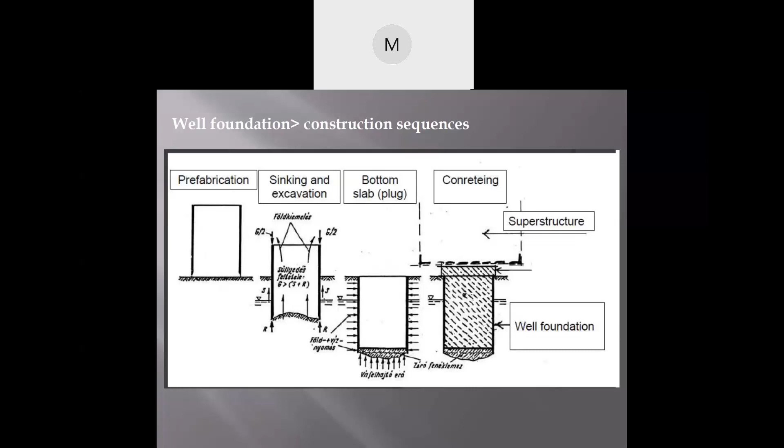So these are now the construction sequences. First of all, the first stage is prefabrication, that means a prefabricated structure is constructed. Then sinking and excavation of the well is done on the basis of their self load. Then after that we have the bottom slab plug that I discussed in the last class. There is a bottom plug, and after that we just do the concreting above it. You just put the well cap and then do all the necessary concreting. This is how the basic steps are there.

Now we'll have stability analysis of your foundations. So I'll give you a brief overview about it - stability analysis of your well foundations.

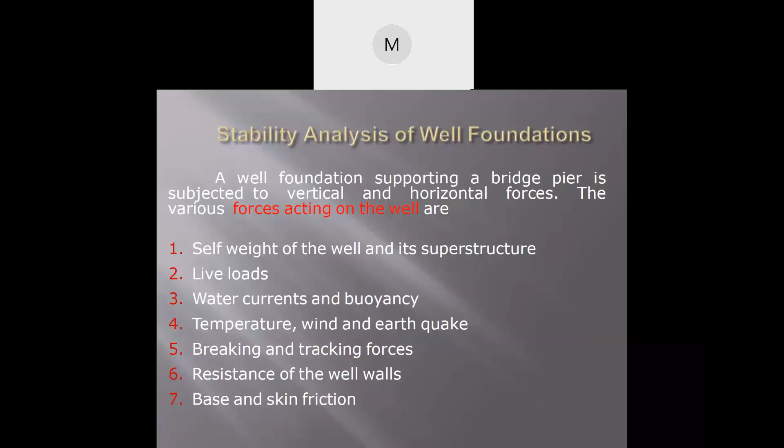So a well foundation, which is supporting a bridge pier, is subjected to vertical and horizontal forces. The various forces acting on the well are self weight of the well and the superstructure, then live loads, water currents and buoyancy, temperature, wind and earthquake, braking and tracking forces, and resistance of the well walls, base and skin friction. Now, as per IRC and IS 3955, the following design procedures are recommended.

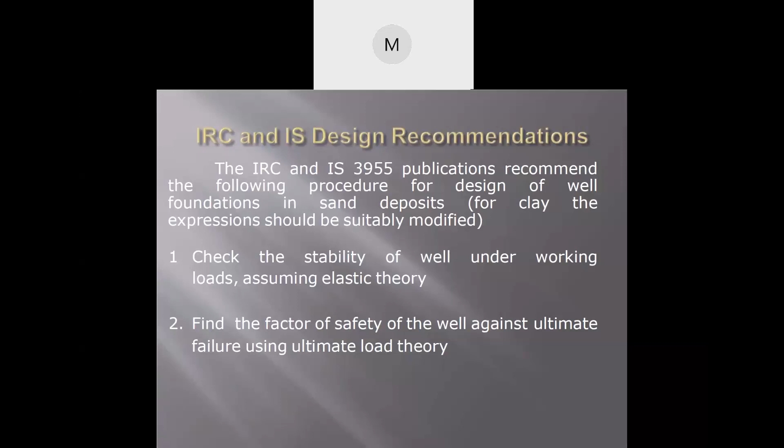First of all, check the stability of the well under working loads, assuming elastic theory. Then we'll have to find the factor of safety of the well against ultimate failure using ultimate load theory. So these are the two basic things required to be considered while designing a well.

Now, design of wells basically involves the following findings: number one, depth of the well; number two, size of the well; number three, design of the other components. So the depth, size, and design of the other components.

Now, tilt and shift - what are these basically? Suppose the well sometimes shifts from its original position, or it causes obstruction on one side of the well. So the well sometimes may tilt or shift from its original position. Then there may be certain problems.

Now these problems are basically the causes of those tilt and shift. Number one, non-uniform bearing capacity - the bearing capacity is not uniform. Then number two, obstruction - if obstruction is present on one side of the well, then there may be tilt and shift.

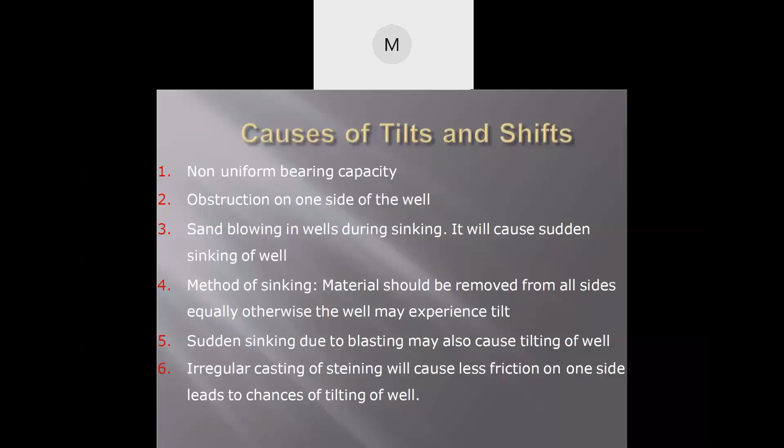Now, sudden sinking due to blasting may also cause tilting of the well. Then irregular casting of steining will cause less friction on the side, leading to chances of tilting the well. Now, if the steining is not cast in a regular manner, this will cause less friction, which will eventually lead to the tilting of the well.

Sinking of caissons - now, caisson means that outer casing of the well. There may be certain sinking of caissons also.

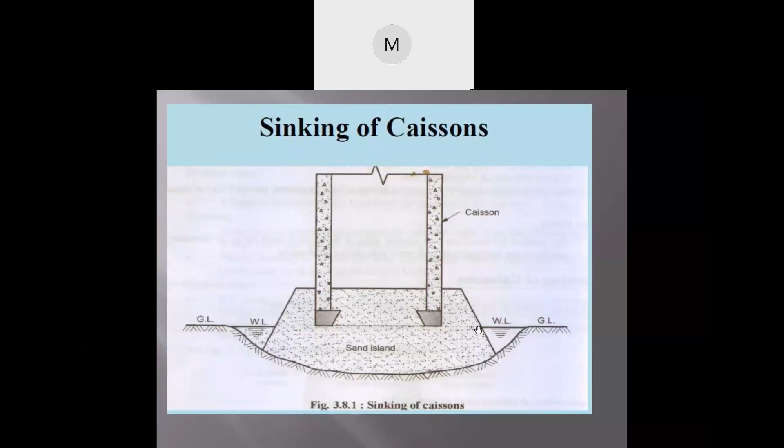Now, in order to prevent and avoid this tilt and shift, certain precautions are required to be taken. So what are those precautions basically? The cutting edge of the caisson must be thick and sharp pointed. The external surface of the steining and caisson curb should be smooth. The dredging should be done uniformly on all sides in all pockets of the caisson.

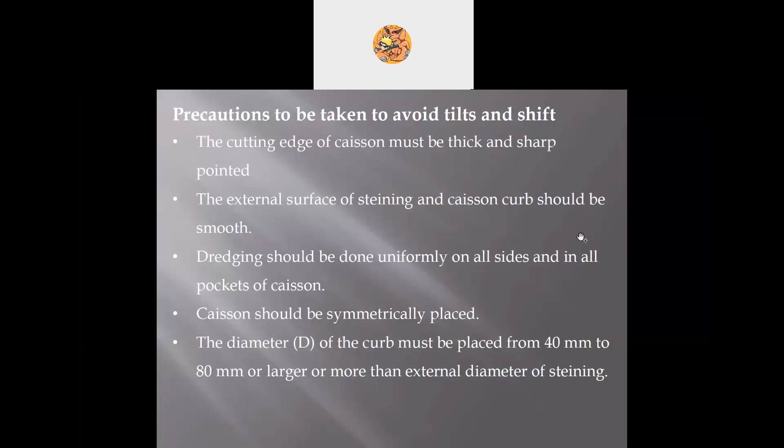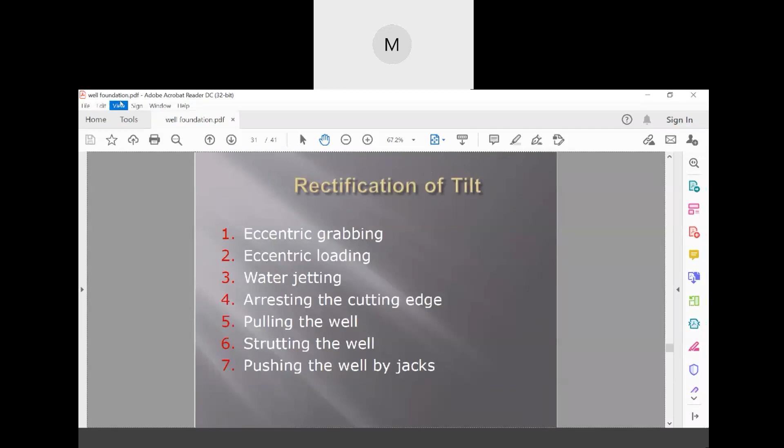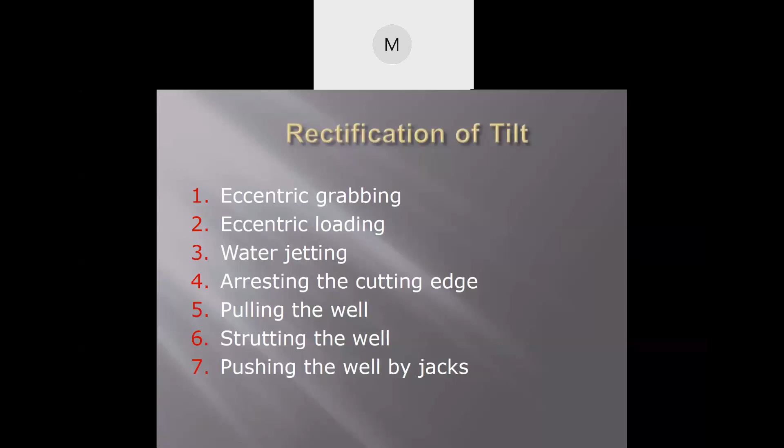So now it is rectification of tilt. Now how is the tilt to be rectified? Number one is eccentric grabbing. So what is eccentric grabbing?

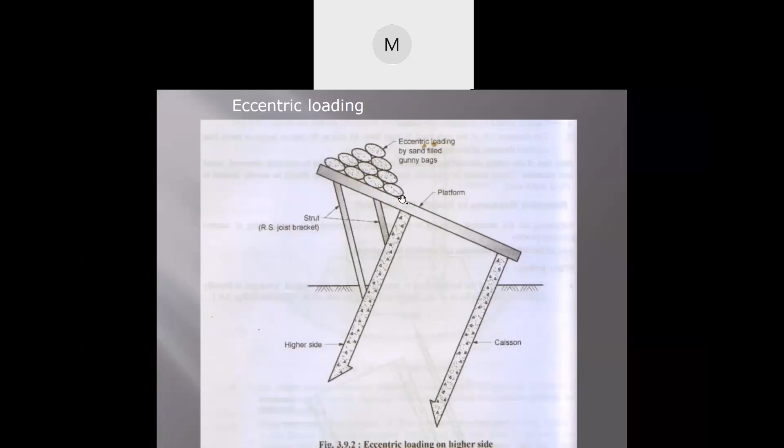Then water jetting. What is this water jetting thing? Can anyone say what this water jetting thing is?

Sir, maybe to loosen the soil. You are almost correct - to loosen the soil, so that it can tilt back to its position. Good. What about others?

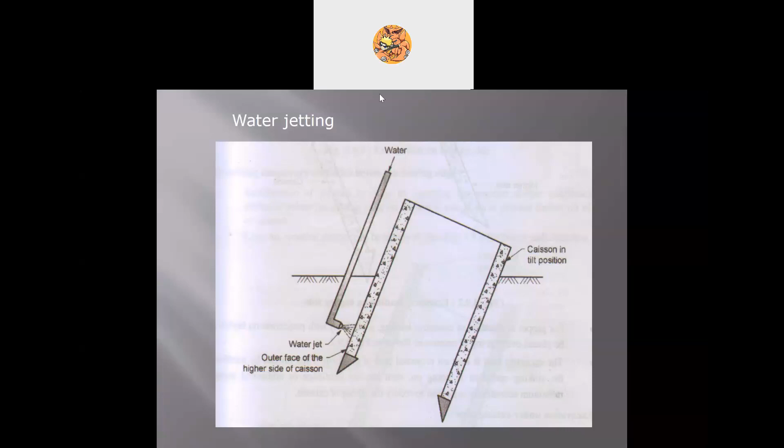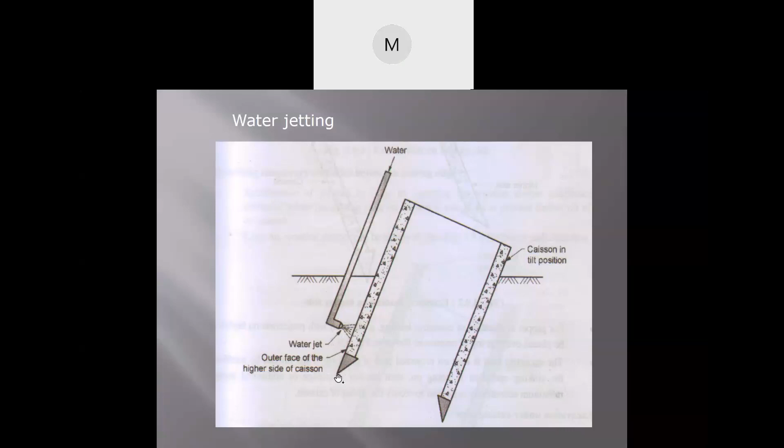Okay, good. So basically, the water is supplied through a jet, and then what happens is that this bottom part will get dug up, right? That means this will eventually sink down.

Next is excavation on the higher side. Now this is a simple thing, everyone knows it. If you are excavating here using an excavator, then this will sink down, no? These are certain simple techniques.

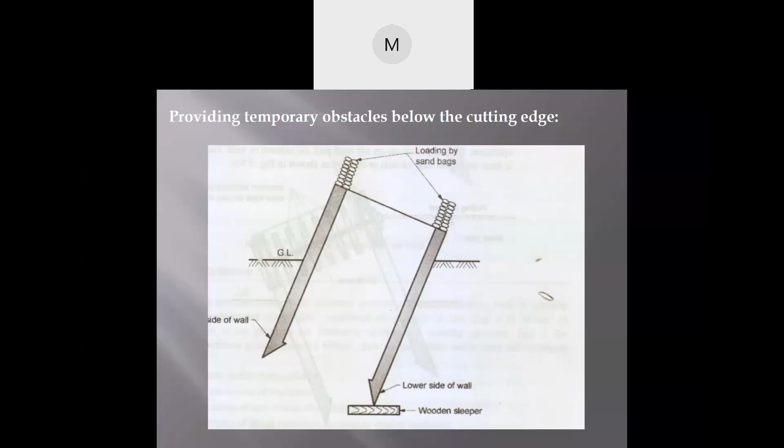Now this is eccentric loading only, but this is a bit more complicated. We have to put some temporary obstacles below this cutting edge, and then place some loadings. But putting an obstacle in the bottom part is a very difficult task. Then, pulling the well or caisson.

Now look, this well or caisson can be pulled up, but this also requires a lot of time and energy, and resources are also required, heavy machinery and all. First of all, you have to put wooden sleepers, and then you have to tie it with a steel rope. Then it is pulled with a rope. So this is a very difficult task also.

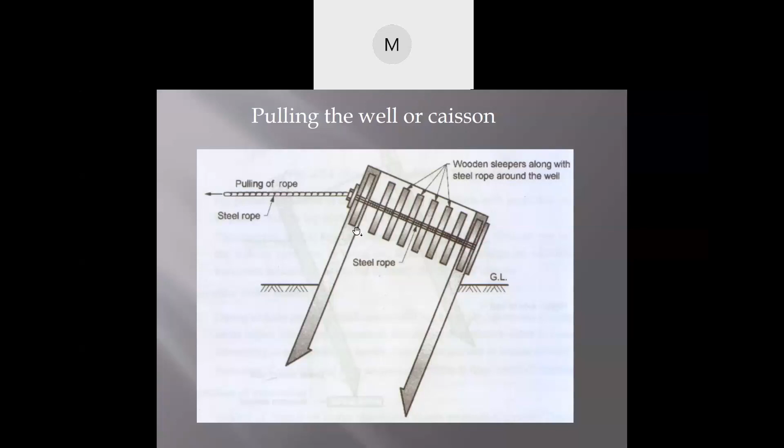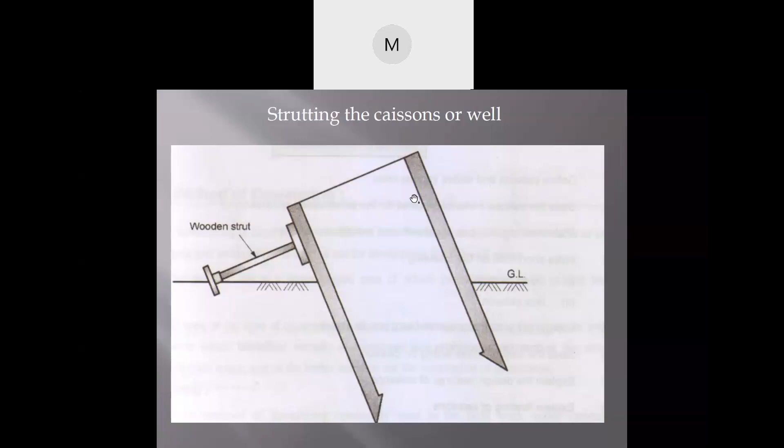The initial ones are very simple. And this wooden strut is what? This is the permanent structure that is attached to it. Now, what will happen? This will prevent more tilting. So this will prevent more tilting. This means what? It can be pulled from this side and then again it can be made straight. Okay.

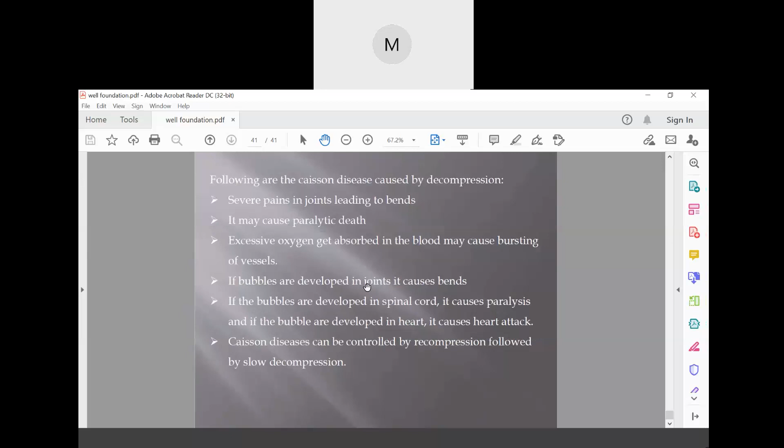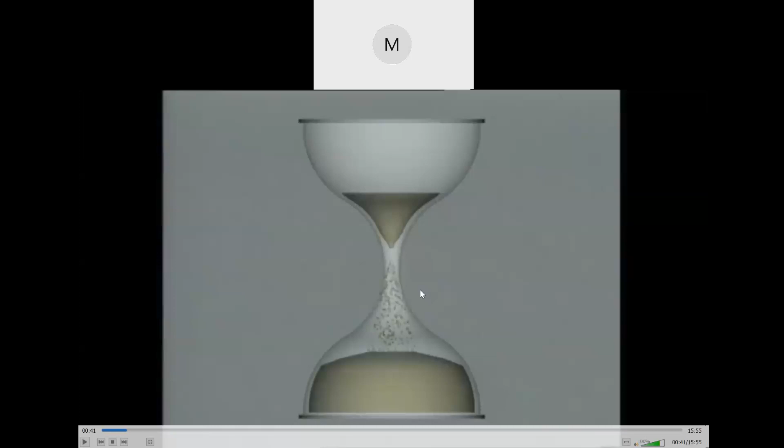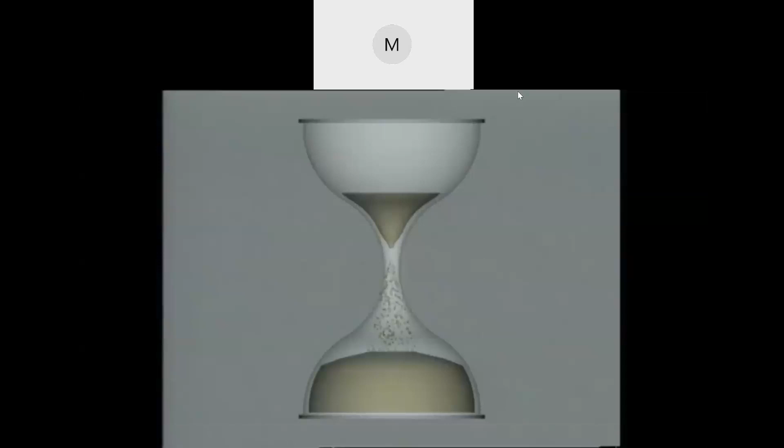The video that I showed you in the last class, was it clear for all of you, or should I show you that video again? Yeah. Again. Okay. Fine. Now you will understand it much better. Okay, I'll show it again. Can you all see the screen? Yes? Okay, that's great.

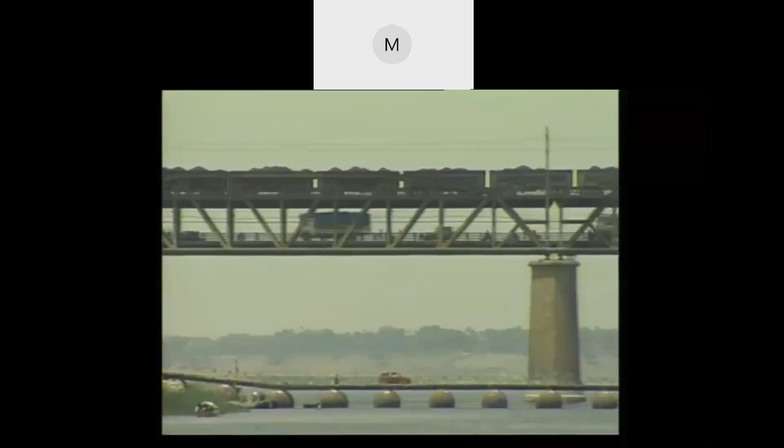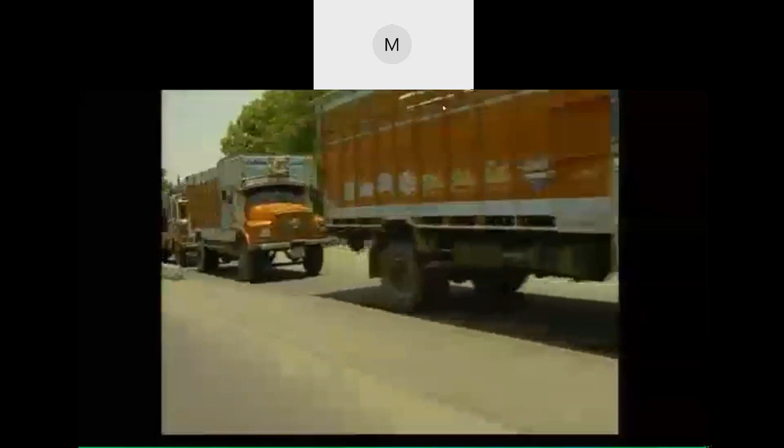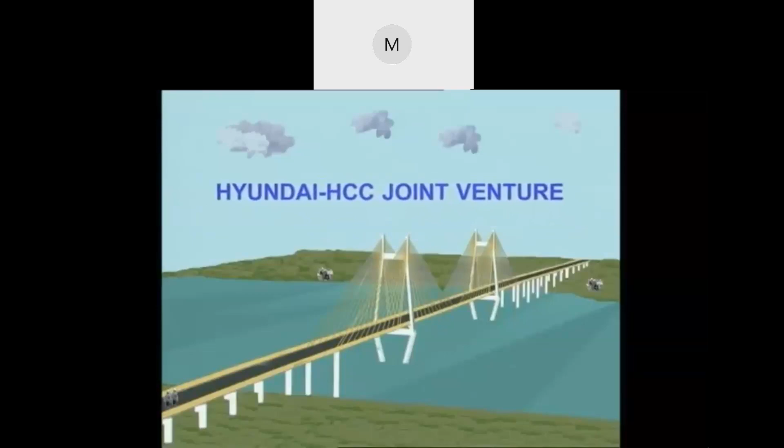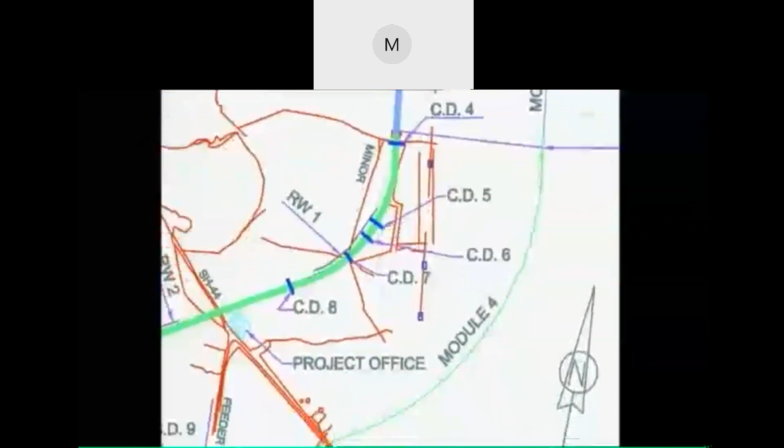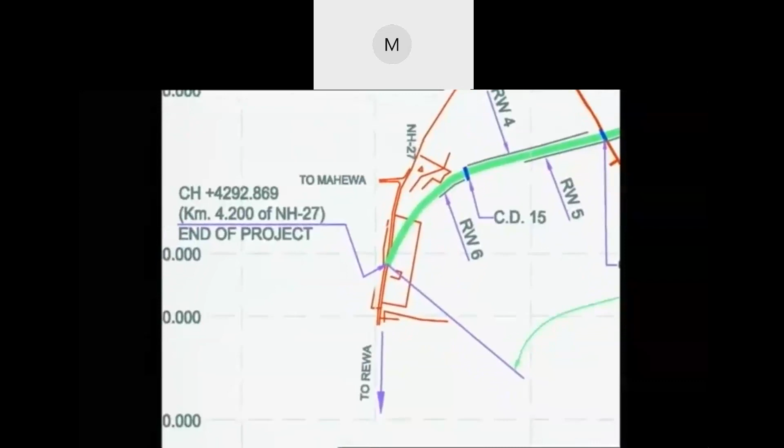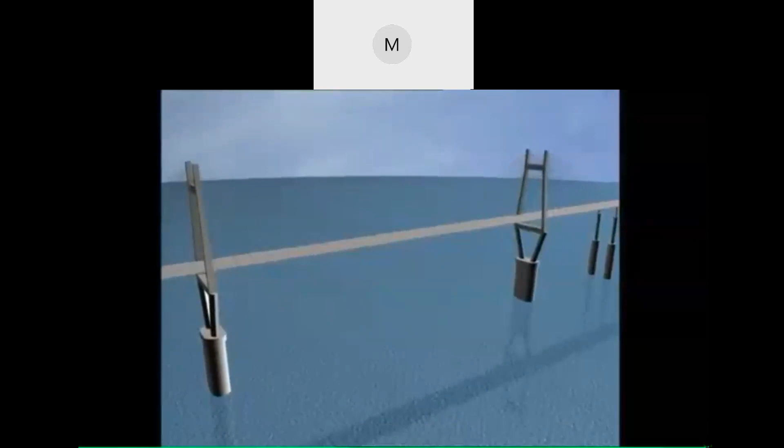Following a detailed survey of the area on both banks of the Yamuna, the National Highway Authority of India finalized alignment of the new bridge connecting GT Road on NH2 on the Allahabad side with Rewa Road on NH27 on the Naini side. The total length of the connection is 5.155 kilometers, comprising of 3.5 kilometers of approaches and 1.5 kilometers of actual bridge. The river Yamuna is still extensively used for navigational purposes by local people. Hence, another challenge before NHAI was not to disturb the navigational use of the river. NHAI, therefore, decided to opt for a cable-stayed bridge, as it provides wider navigational passage. For speedy and systematic completion of the work, the entire scope of the work was divided into 4 independent modules.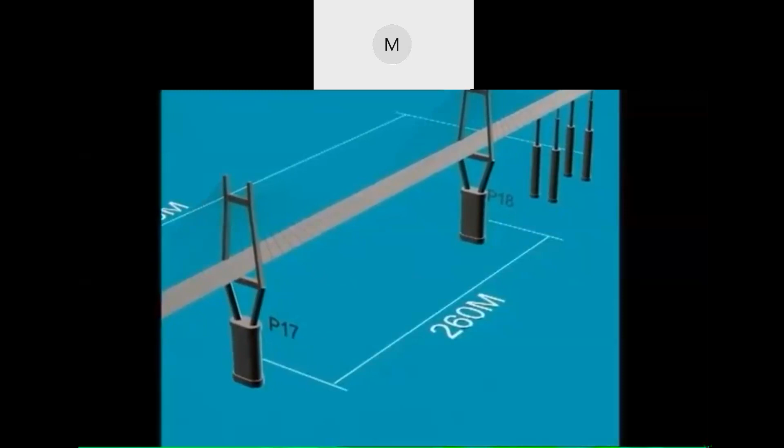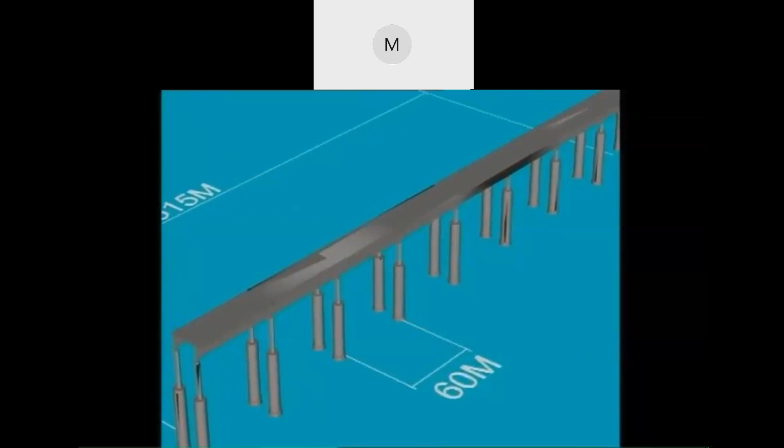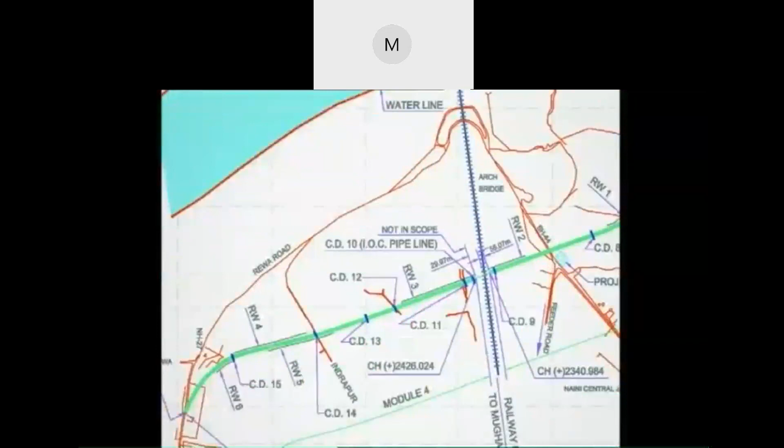Module 1 contains cable stayed portion of 630 meters length with central span of 260 meters, supported on double D well foundations with depth up to 40 meters. The approach viaduct of 515 meters length on the Naini side with spans of 60 meters founded on circular well foundations is included in Module 2, whereas the 365 meter long approach on the Allahabad side with 25 meter spans supported on 1.2 meter diameter piles is included in Module 3. Approach road works, which includes embankment works, retaining walls, cross drainage works, pavement works, safety signboards, etc., are included in Module 4.

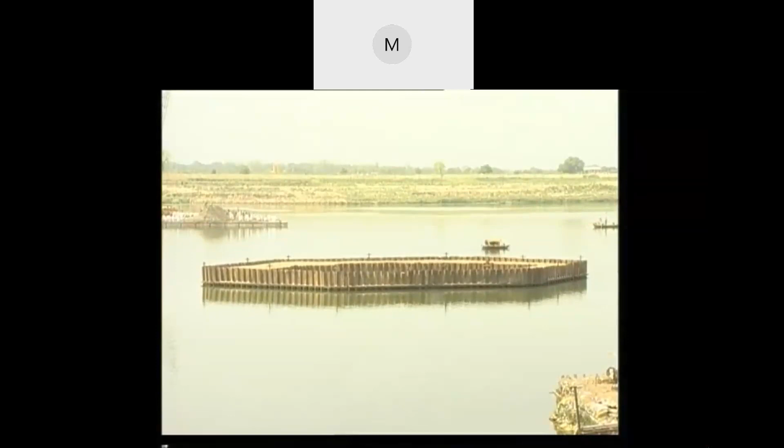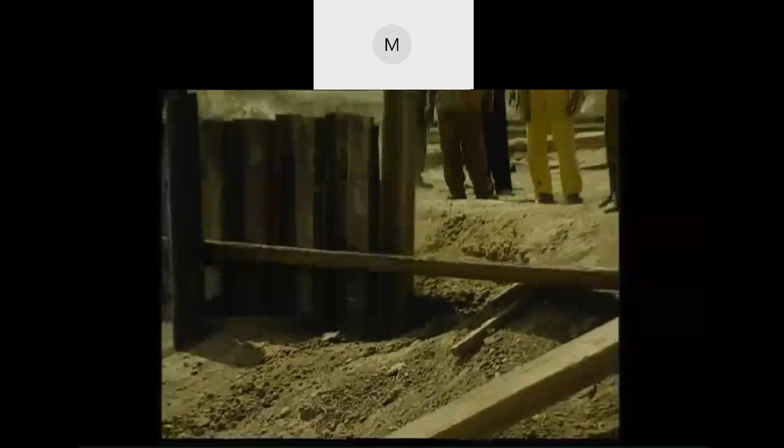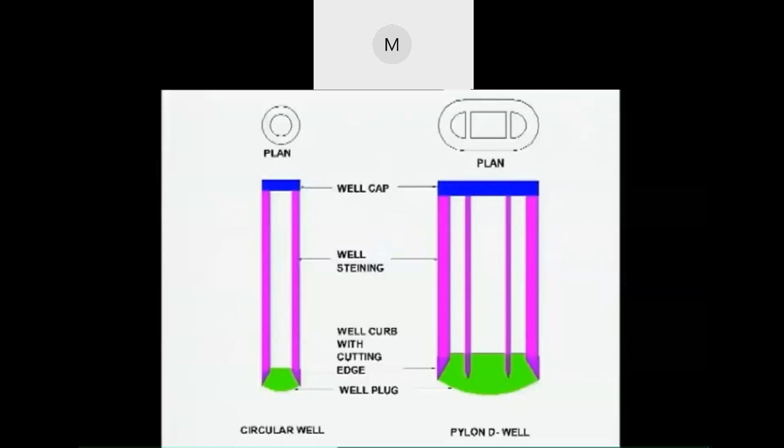After the center line of the bridge was established with the help of precise survey, foundation works were taken up. Foundations of the pylons P17 and P18 supporting cable stayed portion had to be built in the middle of the riverbed, which were enclosed by coffer dams, access to which was provided by jetties constructed on both banks. The jetty on the Naini side is 260 meters long with double sheet pile enclosure driven by vibro sinkers. The jetty on the Allahabad side is a timber structure 100 meter long. Well foundations. The well foundation work is executed in the following stages: cutting edge, well curb, steining, bottom plug, and well cap. Cutting edge. The cutting edge serves to cut through the soil strata and facilitates the sinking of the well to the desired founding level.

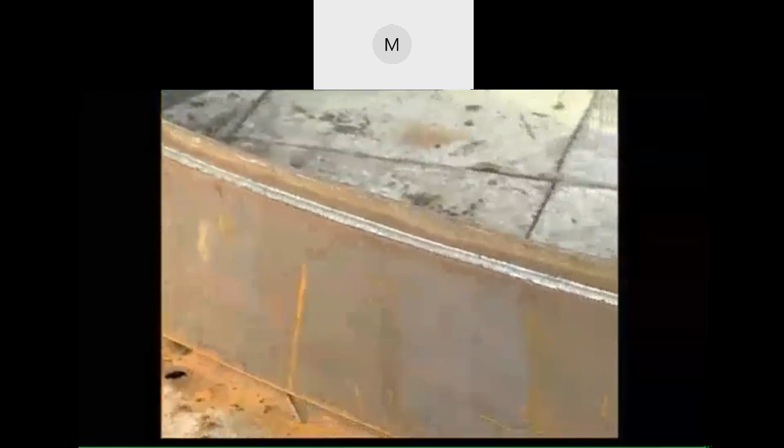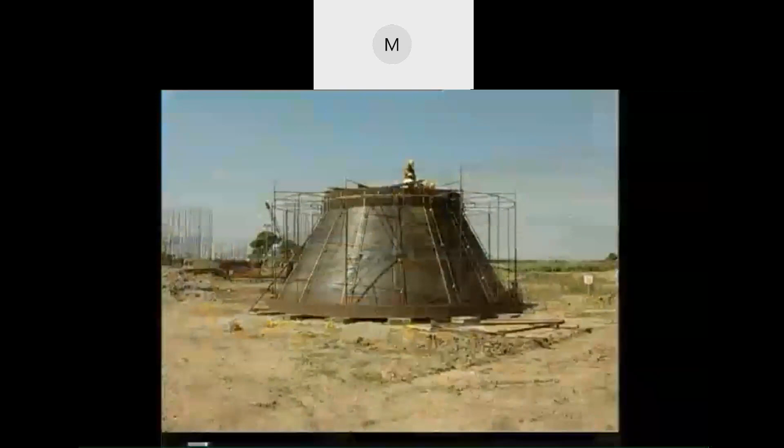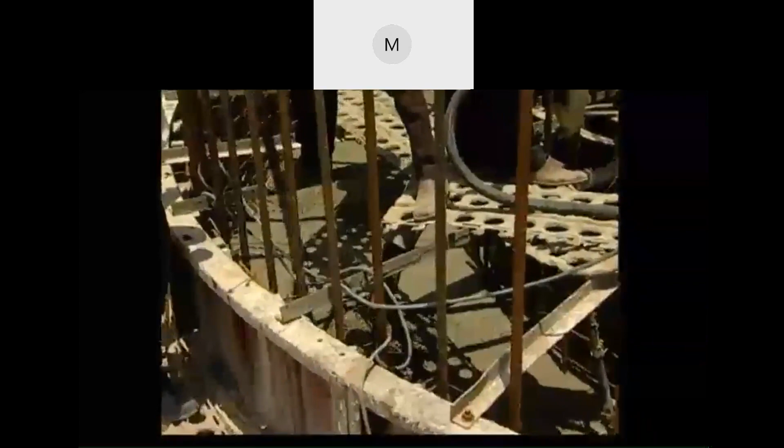The cutting edge consists of back-to-back angles welded with a 12 millimeter plate bent to shape on the outer periphery. Before the final assembly of the angles, holes are drilled into the face of the angle to receive the bond bars. The cutting edge is placed on timber sleepers after the ground is leveled and center point is established. Well curb. On the cutting edge, well curb is cast in concrete within tightly fitting inner and outer forms with embedded reinforcement. Plywood formwork of PERI make is used for pylon wells. The concreting is carried out in layers using concrete pumps and transit mixers. Needle vibrators are used for compacting the concrete. The well curb is pitched into the ground by removal of sleepers placed beneath the cutting edge. The dredging inside the well curb is carried out manually. Well steining. When the well curb is partially sunk into the ground, well steining is built in lifts of 2.5 meters and sunk into the ground. Well steining for pylon wells is built in lifts of 2 meters height.

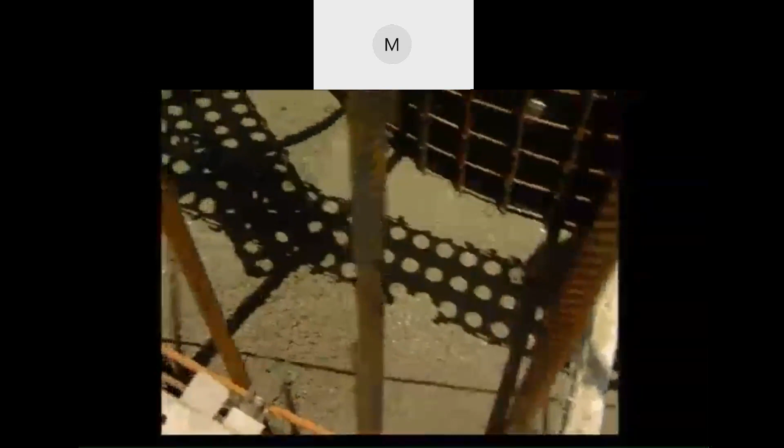The concrete is transported from the batch plant and is poured using a concrete pump. For P17 well, the concrete is placed by crane and bucket arrangement. Concreting is done in clockwise direction in layers. The green concrete is vibrated using needle vibrators.

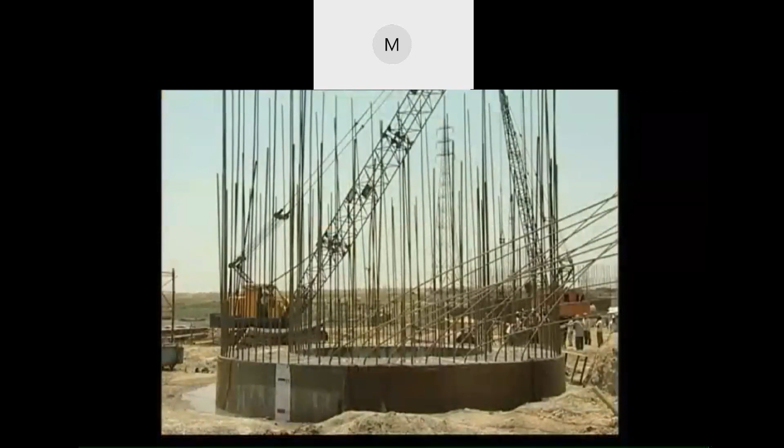Well sinking. Well sinking is an important activity and is carried out with utmost care. The wells normally sink into the ground by their own weight. The soil underneath the cutting edge and in the central dredge hole is removed by using grabs. Continuous grabbing operation is carried out till the well is sunk down to the desired level.

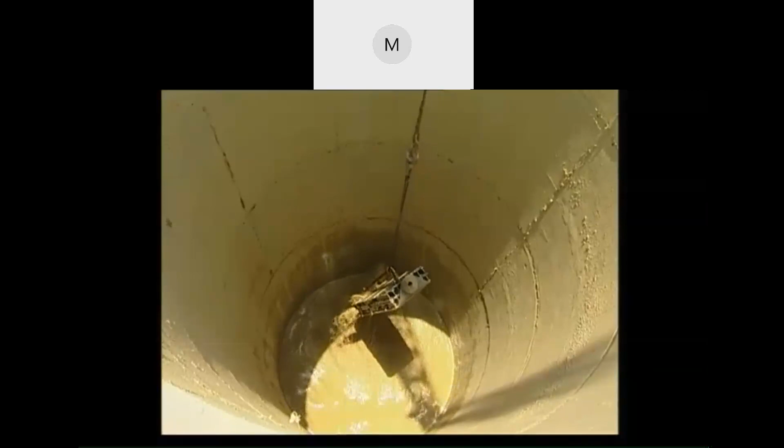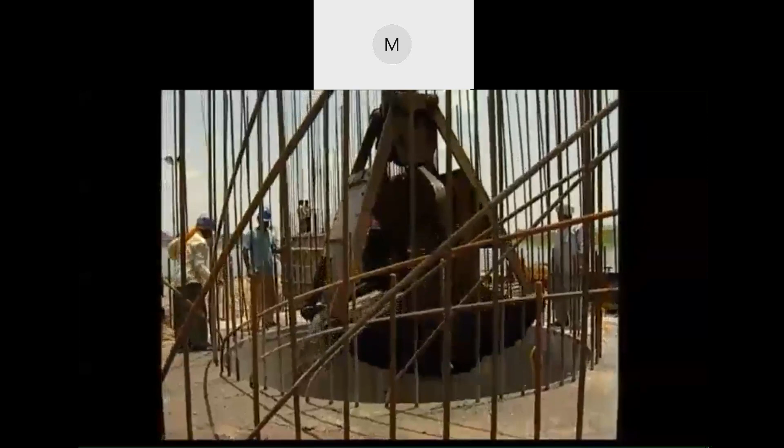In the case of hard strata, chiseling and grabbing method is deployed to loosen the strata, and muck is grabbed out from inside the dredge hole. Care is taken to carry out grabbing in a uniform manner inside the dredge hole. In the case of double wells, the grabbing is carried out uniformly in the outer dredge holes, employing 2 cranes, followed by the inner dredge hole.

Readings are taken during sinking on the gauge marks to measure any shifts or tilts, which, if noticed, are corrected by eccentric dredging or by placing eccentric kentledge loads and carefully monitoring the movement of the wells.

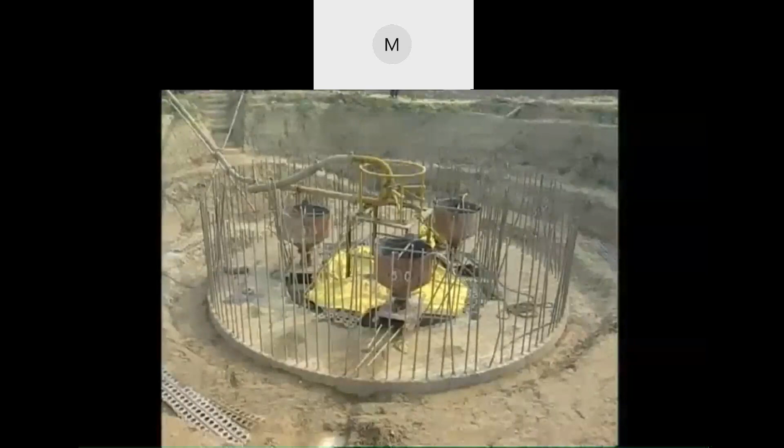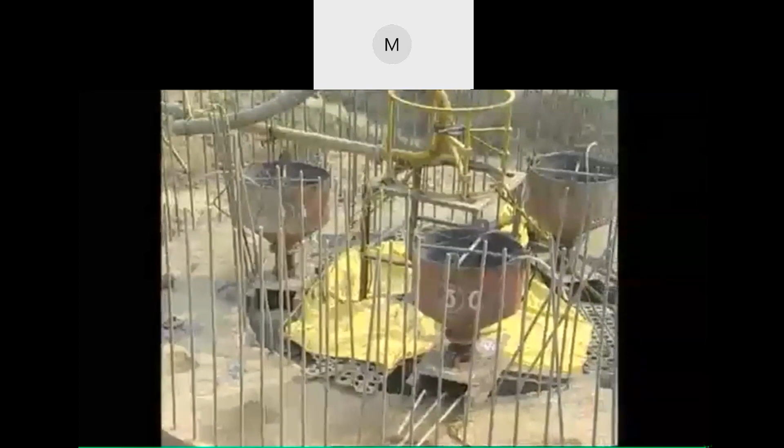Well plug. When the well reaches the founding level, grabbing operations are discontinued and the well is made ready for plugging. Confirmatory bores are taken to study the soil parameters. Concreting of bottom plug is carried out by tremie arrangement. The tremie pipe with tightly sealed joints is lowered into the well, and a hopper is placed on top to receive concrete. A swivel concrete distributor connected to the concrete pump is placed at the center of the well. The concreting is carried out in clockwise direction, moving from one hopper to the other.

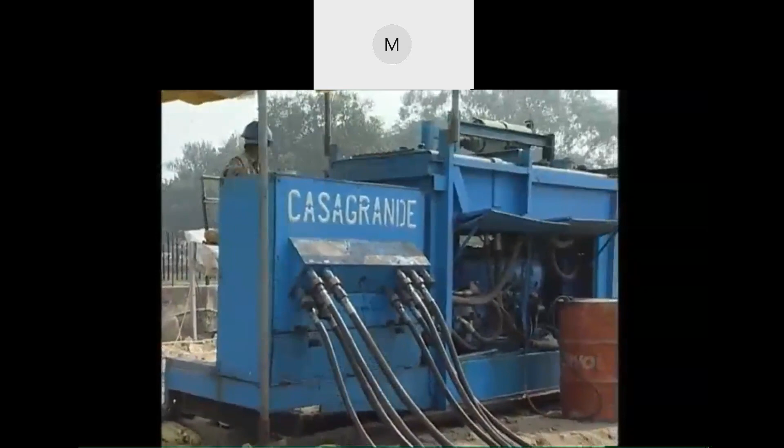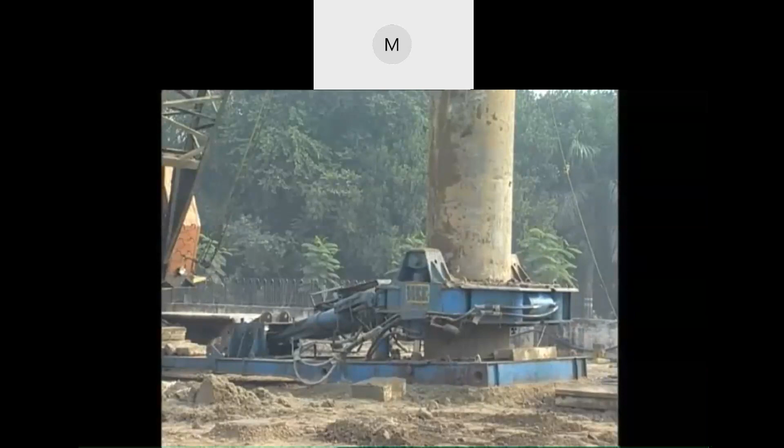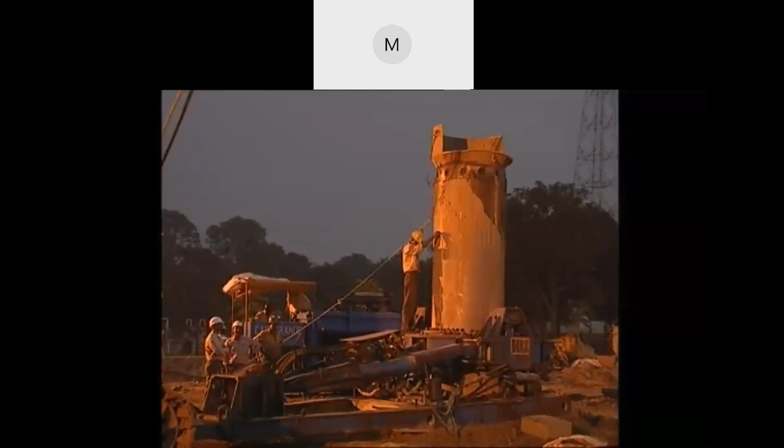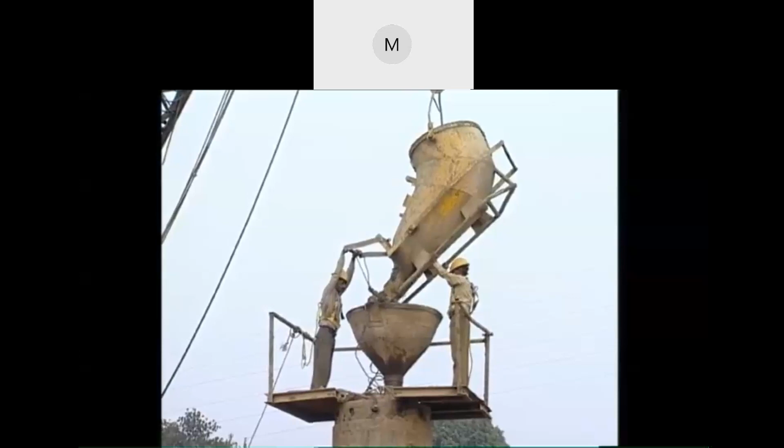As the casing pipes are driven, a tiny grab is employed to remove the muck from inside the casing. When the casing pipes are driven to desired depth, soundings are taken to check whether further boring operation is required. Thereafter, the reinforcement cage is lowered into the bore. Concrete is placed inside the casing by crane and bucket arrangement through a tremie pipe of 200 mm diameter fitted with a hopper. Concrete is delivered continuously to the bottom of the pile bore in stages of 3 meters. When each stage is completed, the casing, along with tremie, is lifted out and concreting is continued up to about 1 meter above the cutoff level.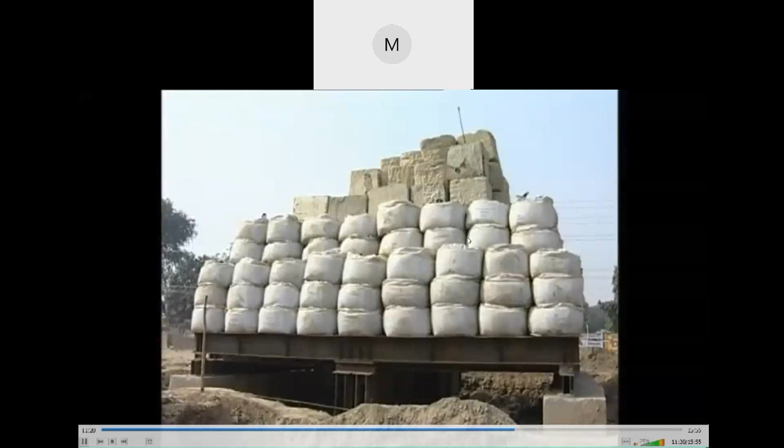The pile is then chipped off up to the cutoff level, and integrity test is carried out to check the soundness of pile concrete. Load testing. The installed piles are tested for the working load capacity envisaged in the design. Tests include 2 initial and routine load tests each. The initial load test consists of vertical as well as lateral loading.

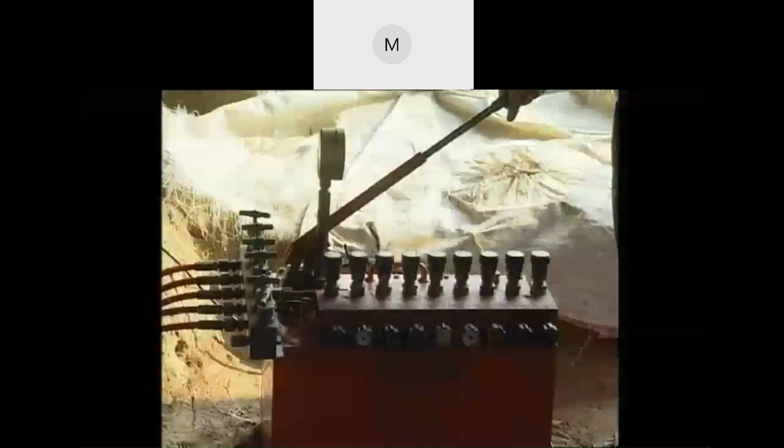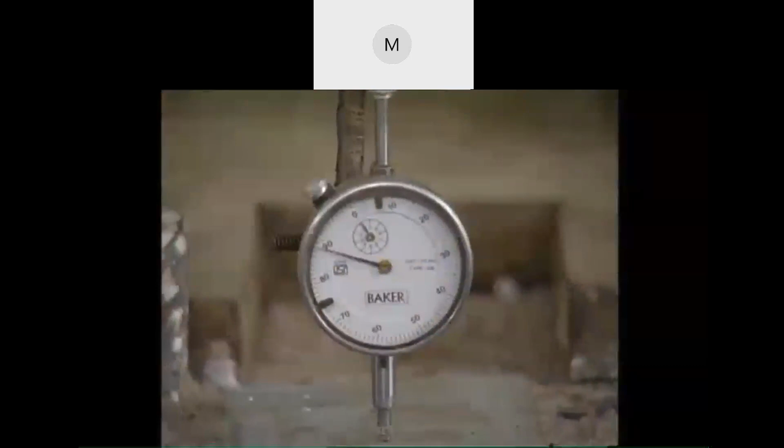The vertical load is applied by a kentledge in the form of jumbo sandbags, each weighing 1 ton, in 9 tiers corresponding to a total load of 850 tons placed on a platform erected on top of the pile. Increments of 20% of the test load are maintained for 1 hour, and the displacement of the pile is recorded by means of dial gauges. When the final load increment is given, the final displacement is noted, and working load is calculated from load displacement graph.

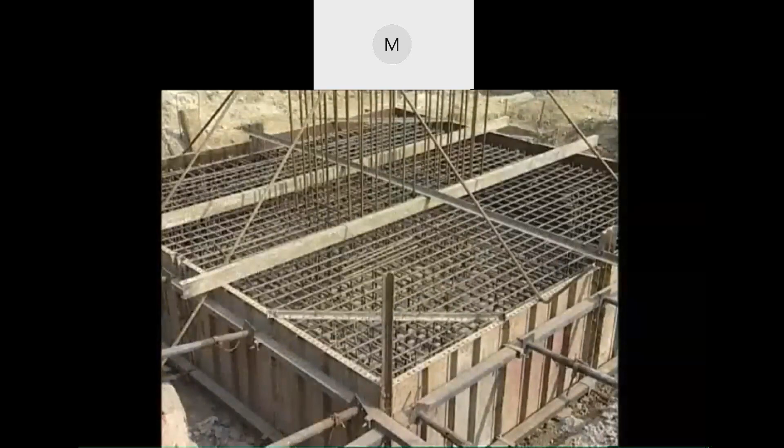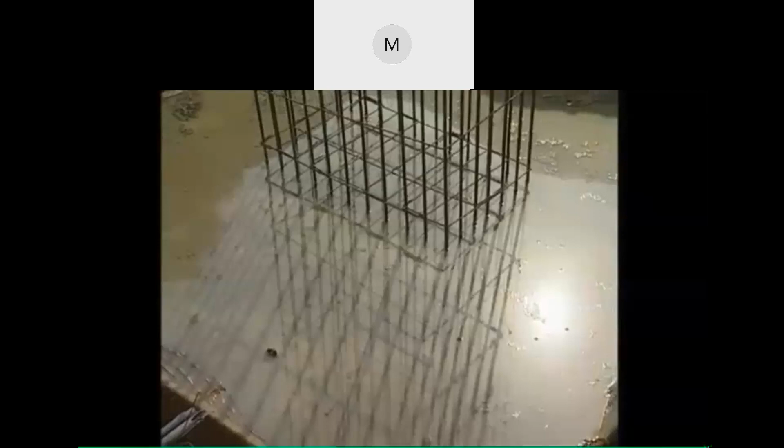Pile caps. Before commencing the activity of pile caps, all the piles are exposed and chipped off to the cutoff level. 100 mm PCC is laid on the plan area of the pile cap and cured. Concreting is carried out using concrete pump and vibrated using needle vibrators. The top surface of the pile cap is made plain using trowels, and curing is carried out by ponding arrangements.

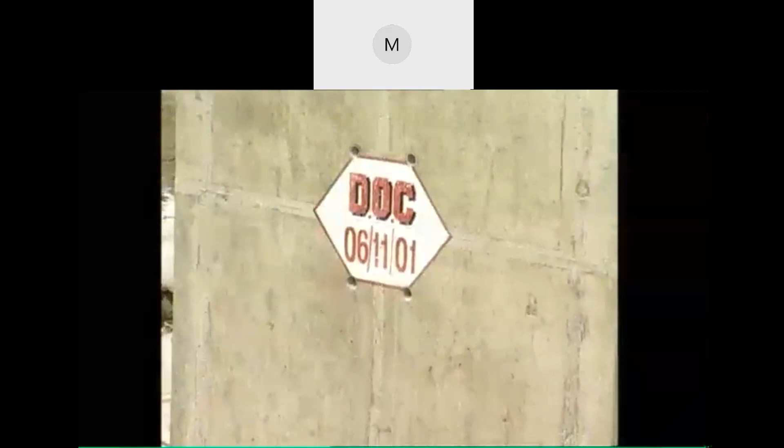Pier shafts. The pier shafts in Module 3 are of size 1200 mm by 2000 mm in plan, with heights varying from 2.5 meters to 7.5 meters, and are cast in single lift. The steel forms are made as per the design. When the rebar fixing is completed for the pier shaft, the form works are placed and aligned for the verticality and center line.

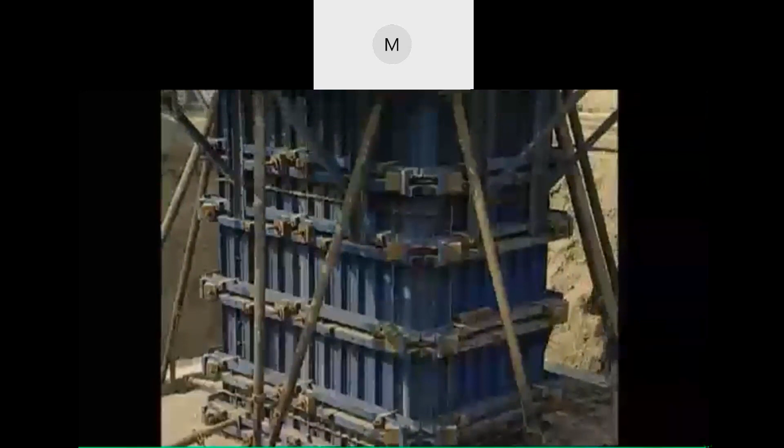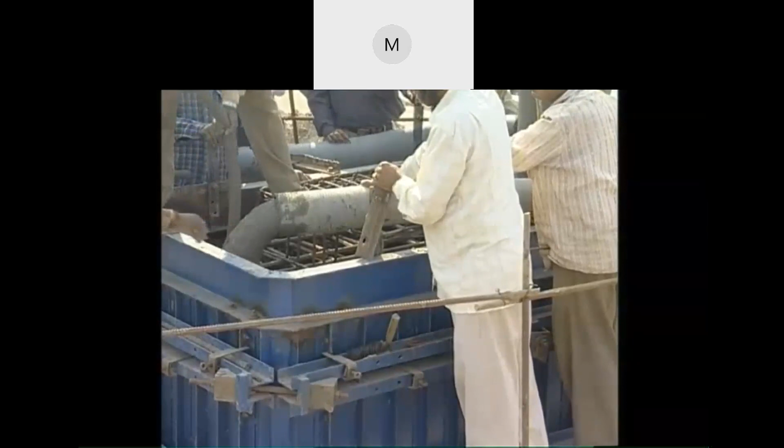Concreting for the pier shafts is carried out through crane and bucket arrangement, and it is vibrated through the needle vibrators. Deshuttering for the pier shaft is carried out 24 hours after concreting. The surface of the shaft is wrapped with Hessian cloth and curing is carried out.